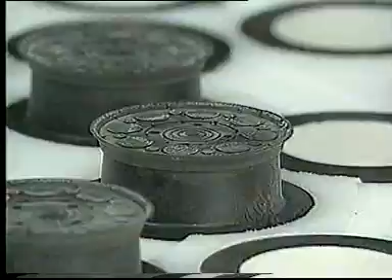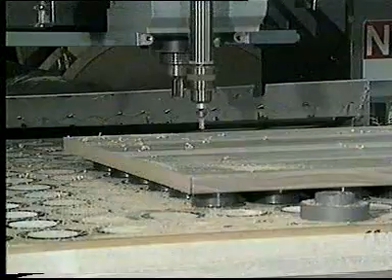Introducing a dramatic advance in technology for CNC router production that sets a new pattern for efficiency. The Carter Flip Pod System. It's a revolutionary new concept in piece part work holding for CNC production that cuts costs, reduces setup time, and increases production output for industries that do repeat cutting and drilling of wood, plastic, or non-ferrous metal parts.

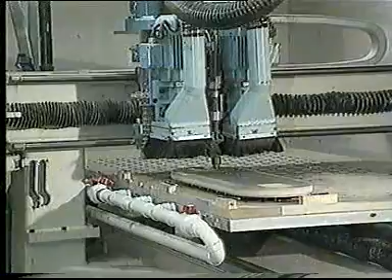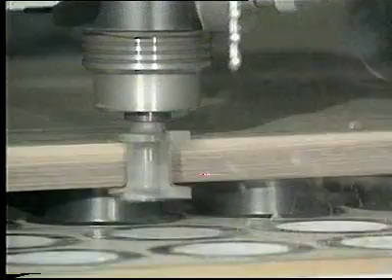The Carter Flip Pod vacuum piece part holding system directs vacuum power exactly where it's needed to hold parts in place for machine processing. The Carter Flip Pod system is based on a grid of cavities fitted into the surface on which parts are placed for processing. By controlling the air passing through these cavities, vacuum can be maintained precisely in any areas desired without using time-wasting spoil boards or other methods.

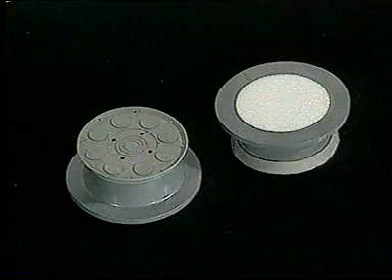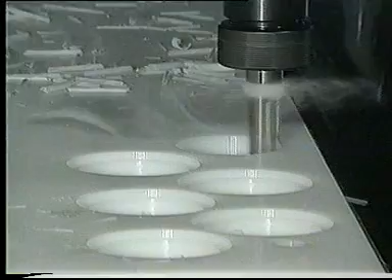This control is accomplished with the special pod elements shown here that fit securely into the gridded surface known as the pod panel. The system is made up of these two primary components. First, the flip pod elements supplied by Carter, and secondly, the pod panel produced by the customer. Finishing the pod panel at the customer's site assures utmost accuracy, since it is customized precisely to meet the capabilities of the equipment and the demands of the task.

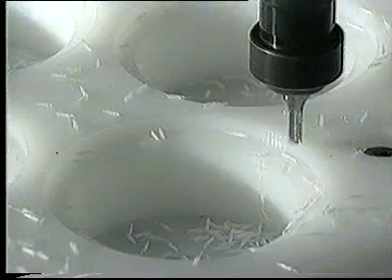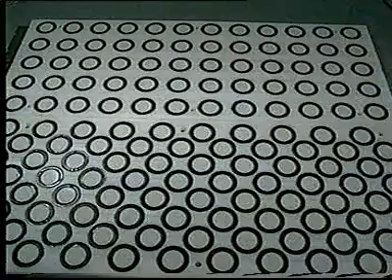Pod panels can be designed to fit the precise task demanded. Pod openings generally are spaced 4 inches or more apart on center from each other. Pod panels can be laid out in almost any design, in diamond, linear, or circular patterns.

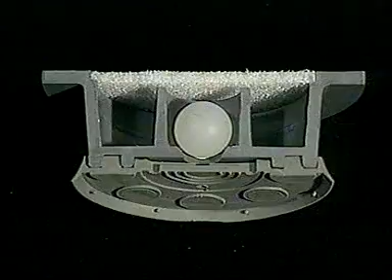Pods are precision-molded circular units constructed of plastic and lie flush to the panel surface, nested in cavities cut into the pod panel. Each pod has a diameter of 3.5 inches and is equipped with a filter element, ball check, and extension cup. In operation, pods are placed in either the off or on positions, depending on whether suction is required at a given point.

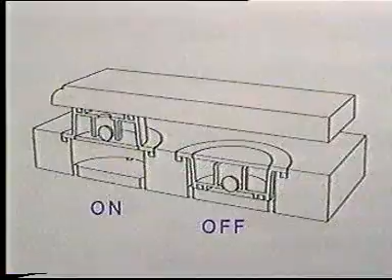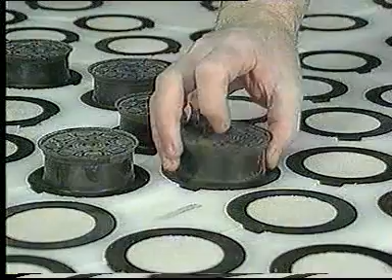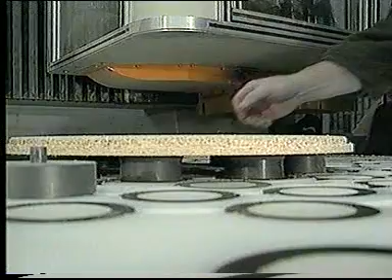Control of the vacuum area can be maintained with total flexibility, simply by repositioning or flipping individual pods. A simple flip into the up position activates each pod. Pods turn on automatically to allow vacuum holding at that specific point, when the operator inverts each pod in the machine seating area of the panel. Pods in the on position lift the workpiece 1 3/32 of an inch above the panel surface to allow machining on all edges and upper face of the part.

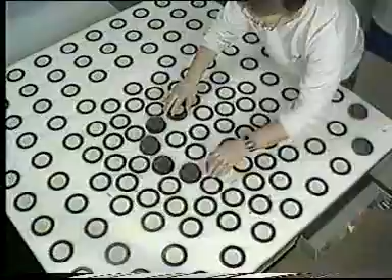All parts of the system self-store or nest within the system itself, facilitating fast changeover from one operation to the next. The system is modular and can be adapted to most CNC router machine vacuum tables currently manufactured, depending on configuration and vacuum pump capacity. Please refer to product literature for specific technical requirements.

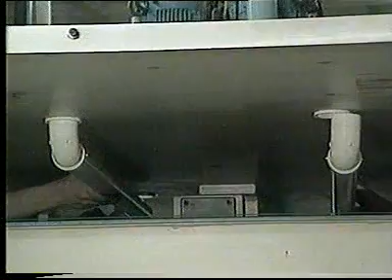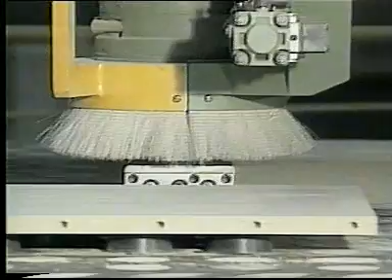Flip pod units do not limit or restrict X, Y, or Z-axis movements of CNC router machining systems. Reliability is enhanced, since there are no moving parts to wear or replace. The material used in the pod system has been carefully selected to prevent damage to cutter heads should they accidentally come into contact. No complex instructions or extensive training are involved in getting the system fully operational.

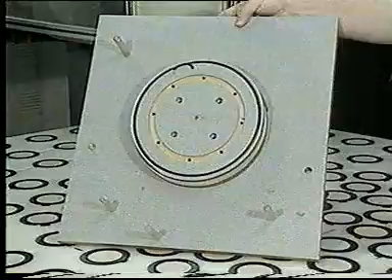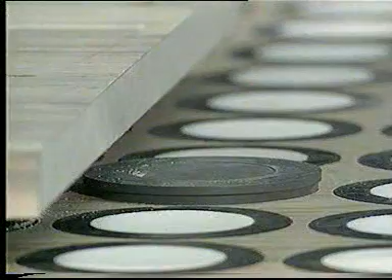Installation of the pod panel does not interfere with the use of small spoil boards for specialized applications. These boards simply are placed on top of the pod panel, using the pod cavities for positive location. Fixed and retractable locator pods accurately position material for processing. Locator pods, offered as an integral part of the Carter Flip Pod system, enable the user to position material accurately for processing.

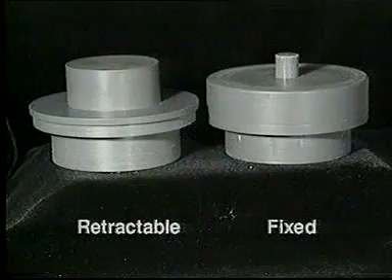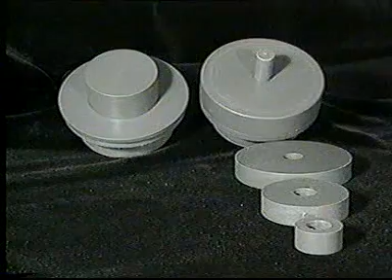Locator pods are available in both fixed and retractable versions, either of which fit in any pod cavity. Each fixed locator pod includes a body, pin, and spacer disc. Different sized discs are available to allow parts to be positioned different distances from the center line of the pod cavity in which the locator is placed. This type of locator is for use where greater positioning accuracy is needed and where no cutting is being done to the edges of the part, which rests against the locators.

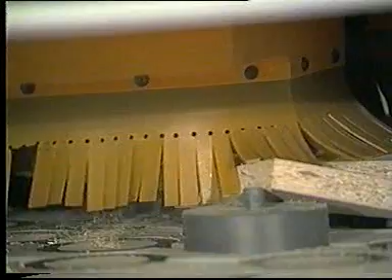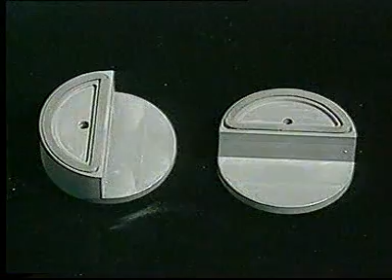For edge cutting, spring-loaded retractable pods pull back to provide clearance for the cutting tool path when the vacuum is activated. Supporting smaller parts exactly at the edge of the cut can be critical. Carter's half pods are available as an accessory for such applications.

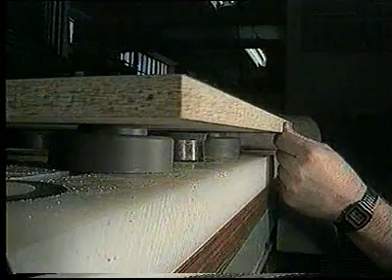Carter's transfer pods are another useful accessory. Placed in the appropriate location, they elevate heavy materials slightly above the flip pods to facilitate movement of the part into the proper position. The Carter flip pod system can be adapted to most CNC routers currently available and has also been successfully used with a variety of point-to-point boring machines.

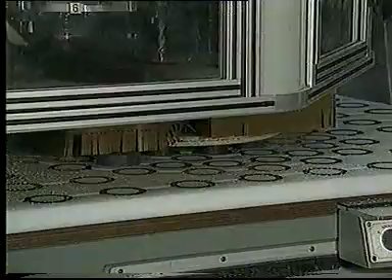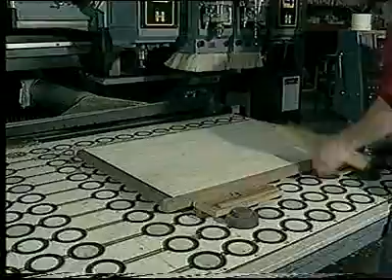Implementation of a system is very straightforward. A complete system can be installed and operational in less than a day. The system's primary advantage is that it eliminates the need for expensive, dedicated fixturing for each part.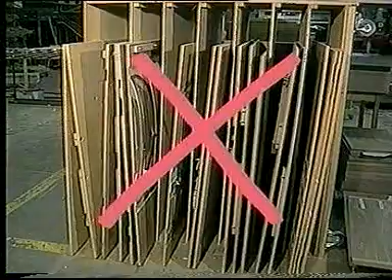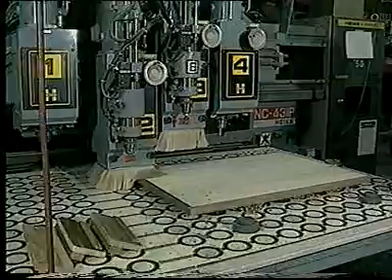It is no longer necessary to incur the substantial labor and machine costs associated with the design and production of large numbers of spoil boards. The flip pod system also frees up the space and manpower that otherwise would be required to store those spoil boards. These cost savings alone result in a very quick payback of the initial investment in the flip pod system.

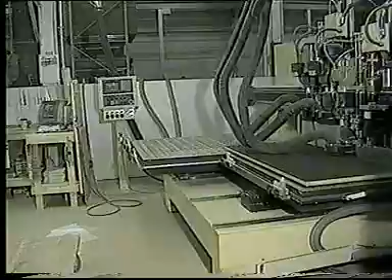Equally, if not more important, the machine setup times associated with changeover between different parts is dramatically reduced. This allows you to be more cost competitive, which can be especially critical for short production runs and prototyping work. These factors combined will result in increased production efficiency and a greater return on your CNC router investment dollars.

It's an advance in technology that has found immediate acceptance with industry. The new pattern of progress in CNC production, the Carter Flip Pod System.

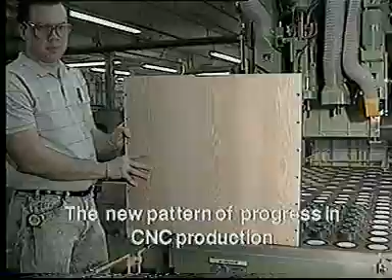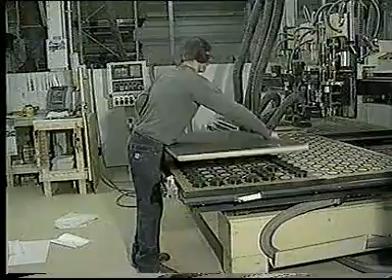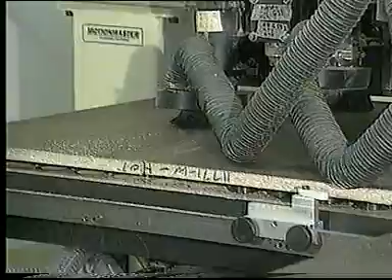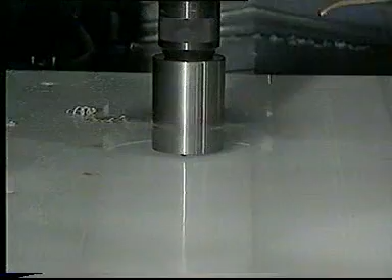The Carter Flip Pod system can work to streamline your CNC router operations and add time-saving efficiencies. This portion of the videotape is designed to help you get started right to capitalize on the substantial advantages it brings with it. The first step to gaining full potential from the Carter Flip Pod system in CNC operations is constructing the pod panel properly. Here are some fundamental points to keep in mind that will help ensure success.

The most basic consideration is pod panel material. The choice here is critical. The pod panel must be fabricated from material that has adequate structural strength, easy machinability, good dimensional stability, and high resistance to the flow of air through the material itself.

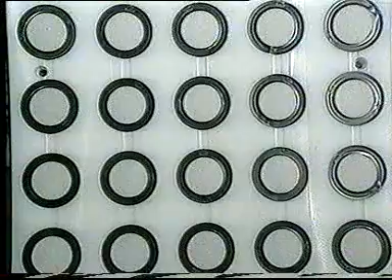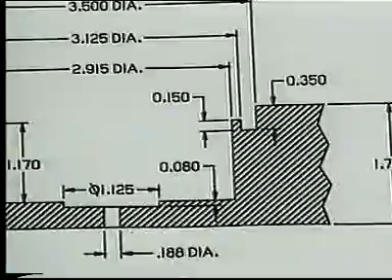After intensive evaluation, it's our judgment that UHMW, one of the more reasonably priced plastics, or an alternative non-porous material with these same qualities, matches the required standards best and is the recommended choice for use in constructing the pod panels. The minimum workable panel thickness is 1 3/4 inch. Thinner panels will not provide the necessary space to mount the pods. Thicker panels will unnecessarily restrict the Z-axis clearance.

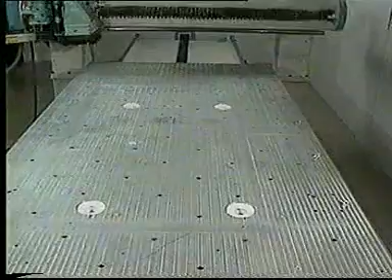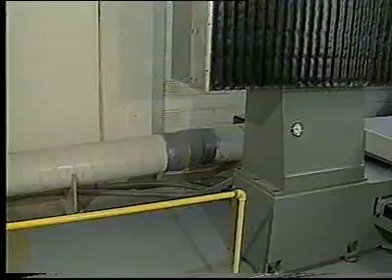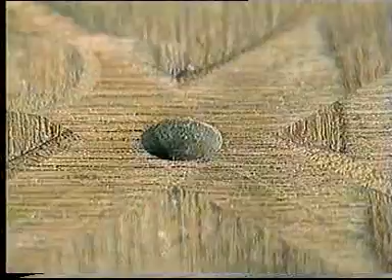The pod panel will be attached to a user-supplied router machine bed or table substrate and powered by a user-supplied vacuum pump. This substrate should be a flat plate of sufficient thickness with adequate underlying support to withstand the loads expected in service without flexing or movement. As noted earlier, the top surface of the substrate must be of material that will not permit air to pass through it. That point is crucial to success.

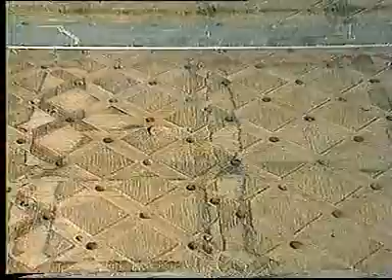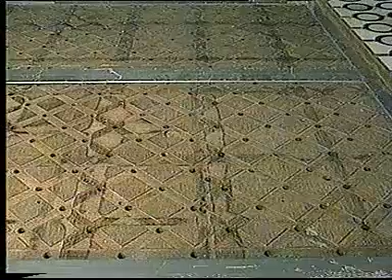For example, if particle board is used as the substrate material, it must have a sheet of high-pressure laminate, the kind usually applied to countertops, mounted on the top surface before the flip pod panel is put in place. Most routers have machined beds with air channels, which can be machined to conform to the underside of the pod panel. For maximum accuracy, it is strongly suggested that the router itself be used to machine the top and bottom surface of the pod panel material.

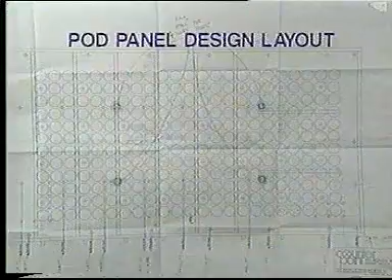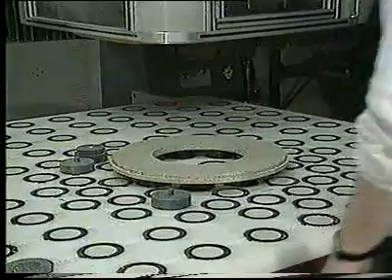Before the process of machining the pod cavities is undertaken, an appropriate pod panel layout and distribution must be designed. A typical uniform pattern might be spaced 4 inches or more apart on center from each other. It should be noted, however, that the user can create any pod panel design in linear, circular, or diamond pattern that is most applicable to the parts being processed. In short, the pod panel layout should be designed to fit the task.

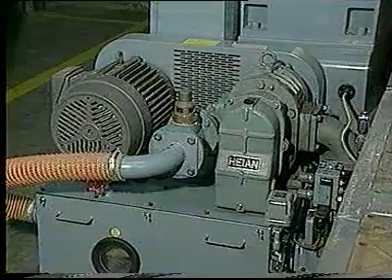The vacuum pump is, of course, a paramount factor involved in the task. To get the desired result, it is vital that your vacuum pump operates within certain minimum performance guidelines. For specifics in this regard, please refer to the Technical Requirements section of the sales brochure.

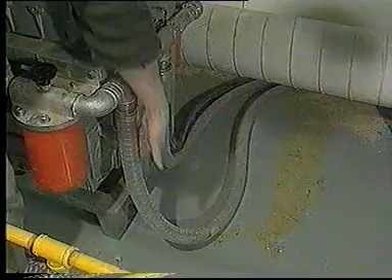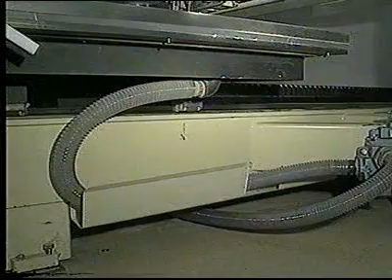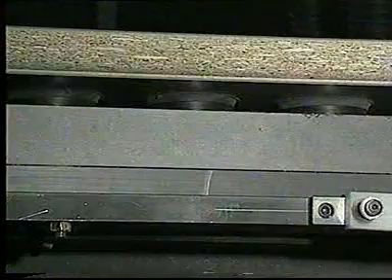The plumbing from the vacuum pump to the machine bed of the router also is important to successful operation of the flip pod system. For example, it is possible to have an adequate pump online, yet find that plumbing components such as air lines and fittings are restrictive. The result of this is that even though the vacuum pump itself is adequate for the system, vacuum reaching the pod panel is insufficient.

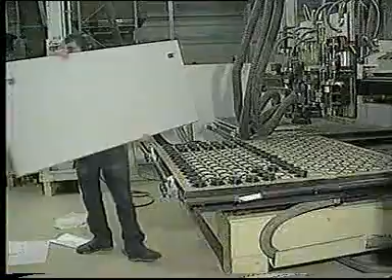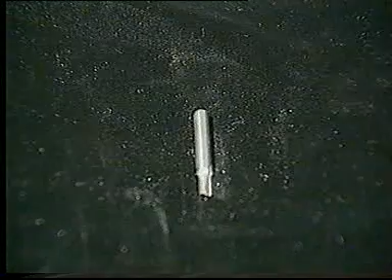After machining the upper groove and wall of the pod cavity, produce a single hole 3/16 inch in diameter in the bottom center of each pod cavity, and a recess 1 1/8 inch diameter surrounding the center hole. The recess area is 0.08 inch lower than the rest of the bottom surface.

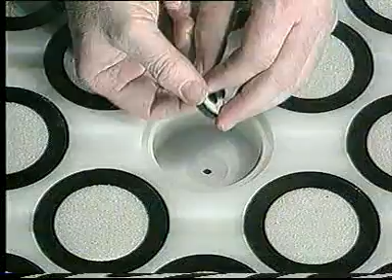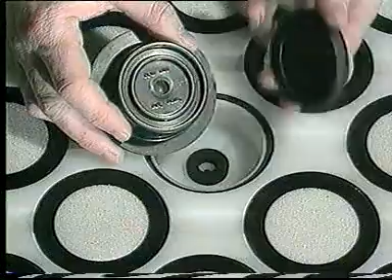Next, the pods themselves are prepared by firmly pressing an extension cup into the groove in the narrow end of the pod, so that the rubber ring on the back of the extension cup fully seats into the groove, and the curved lip of the cup points out away from the pod. Once all the pods are ready, place them cup side down into the cavities of the panel.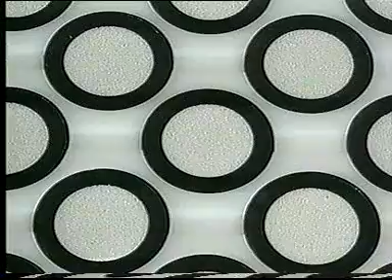After all cavities are filled, apply vacuum to the system and check for and correct any leaks. Each pod that is in the down or off position traps the vacuum and prevents airflow through that cavity. To use the system, simply turn over the pods located under the part or parts to be machined.

Pods turned into the upright position will support the workpiece above the pod panel, allowing easy access to the edge of the part, and vacuum will act through the cavity and pod to hold the part tightly against the extension cup on the top of the pod. Machining a different part is simply a matter of reversing pods in the appropriate areas as required to match the new part.

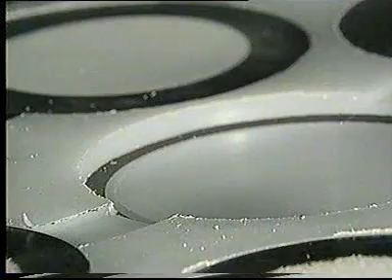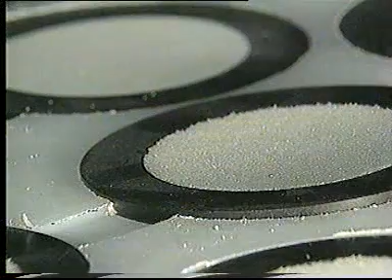In order to flip pods easily from the inactive or off position to the active or on position, you may wish to create finger holes. You can do this by cutting across all the centers of the pods in one direction. Make sure that the depth of such finger channels is less than 0.14 inches from the upper surface of the pod panel. That's important.

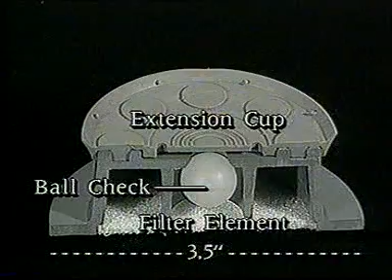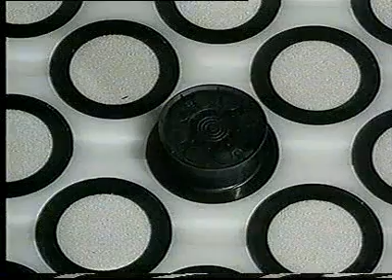To get maximum advantage from the system in operation, there are some factors to keep in mind regarding wear and maintenance. Here's a summary. As you know, each pod contains a small check ball, a covering filter, and an extension cup. When using the pod system, check periodically to make sure that these three elements, as well as the large pod panel, remain intact and in place. Any damaged or missing parts should be replaced immediately. Replacement parts are available separately from Carter.

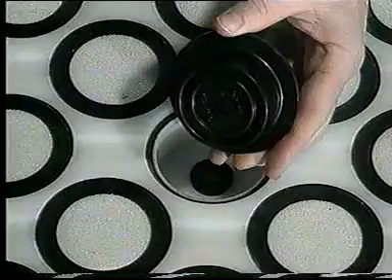If the interior of the pod needs cleaning, simply detach the extension cups and remove the filter by pushing gently with the blunt end of a pencil or similar object through the small hole in the narrow end of the pod. After the pod is cleaned, make sure that the check ball is reinserted into the central cylindrical cavity again, before gently pushing the filter back into place and reinstalling the extension cups. The filter should be installed with the smooth side out. How frequently cleaning is required will depend on the quality of your dust collection system.

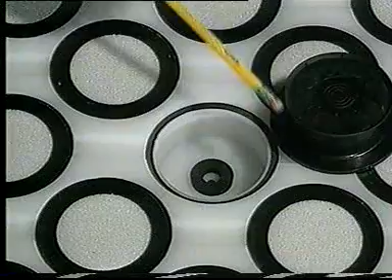As you might expect, some wear can be anticipated on the extension cup and the large gasket after usage, just like the tires wear out on your car as the miles mount. It may in some cases be necessary to replace either of these components from time to time. And of course, routine housekeeping is necessary to help ensure long, efficient operation. The surface of the pod panel should be maintained as dust-free as possible. That will help keep pod components tidy as well.

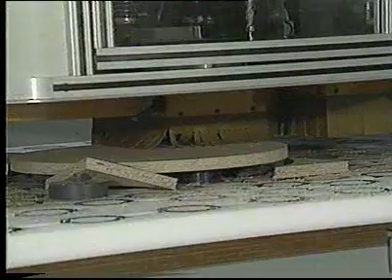We recommend that any cleaning or removal of scrap from the pod panel surface be accomplished while the part is still held in place by the vacuum. Experience has shown this simple process can be significant in the optimum performance of your system. We hope this presentation has covered the preparation and care required to help you get maximum efficiency from the Carter Flip Pod system in your operation.